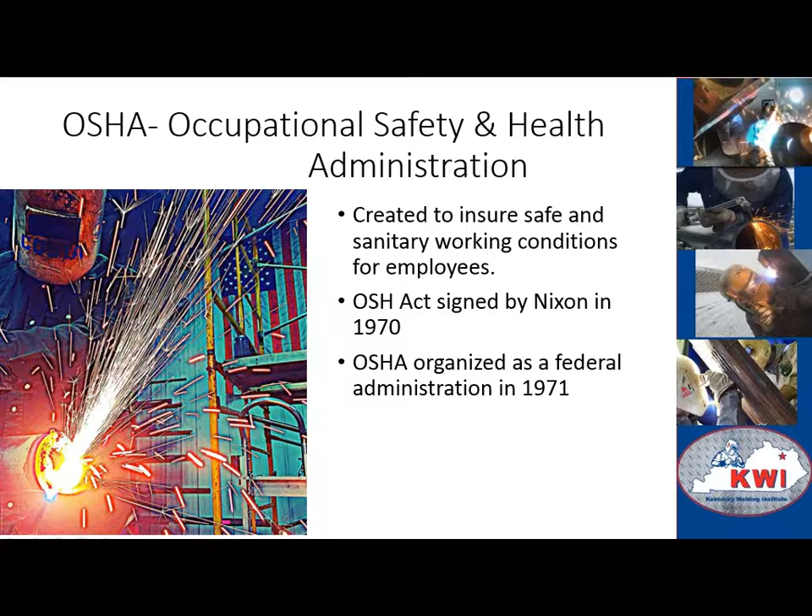Part of OSHA requires that you have the right to know the types of hazardous materials that you're working in or around. So SDS's, safety data sheets, are required by an employer in order to inform an employee what they can be exposed to.

Inside these, each product, for example AL8, has an SDS, and that is 16 sections of anything that would happen, or numbers you could call for who made AL8. Section 4 is first aid and CPR - if you eat it, swallow it, get it in your eye. Obviously with AL8 it's not a big deal, but a 7018 Lincoln Electric Excalibur rod, the SDS is 21 pages long.

Again, 16 sections. I think section 5 is in case it caught on fire - what would the fireman have to do? The 16 sections are nice because now you can roll in easy and find exactly the information you need. So firefighters know to go to section 5 when a product is on fire.

It used to be they weren't organized like that. Pepsi could have only 4 sections, Coke could have 26 sections, all in different order. Now SDSs are uniform - everything has 16 sections, and those 16 sections are all titled the same. Section 1 is product information, who made it, and how can I get a hold of the company. Again, that's all part of your right to know as an employee the types of materials that your company is exposing you to.

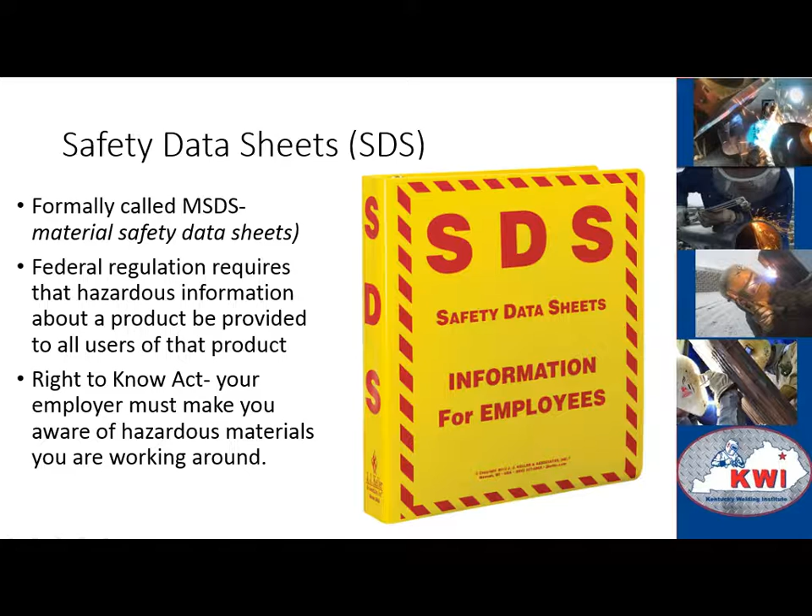PPE starts with eye protection. That is the number one piece. If you had nothing else on, you would need to protect your eyes. Always worn in the welding shop, never taken off under a face shield or welding hood. Those protect your face, they are not to protect your eyes - so again, two separate pieces of PPE. Putting a face shield on does not mean you can take your safety glasses off.

Clear safety glasses are great indoors. A lot of companies view shaded lenses as hazardous inside. Obviously it's already dark with shadows inside the building, and then you put sunglasses on - that's not really helping you out any.

Minimum oxy-fuel cutting and welding is a shade 4, and the glasses must be stamped with an ANSI code. We'll get into here - the next slide will teach you more about ANSI codes. But Z87.1 is the lowest level. Z87 Plus is actually a high velocity impact rating, and then you can have extra suffixes.

So this has an L8, a D3, and a D4. This is showing the D4 is dust protection, D3 is droplet and splash protection, and L8 is a visible light filter, glare reduction. So these L8 would be like a mirror finish on them.

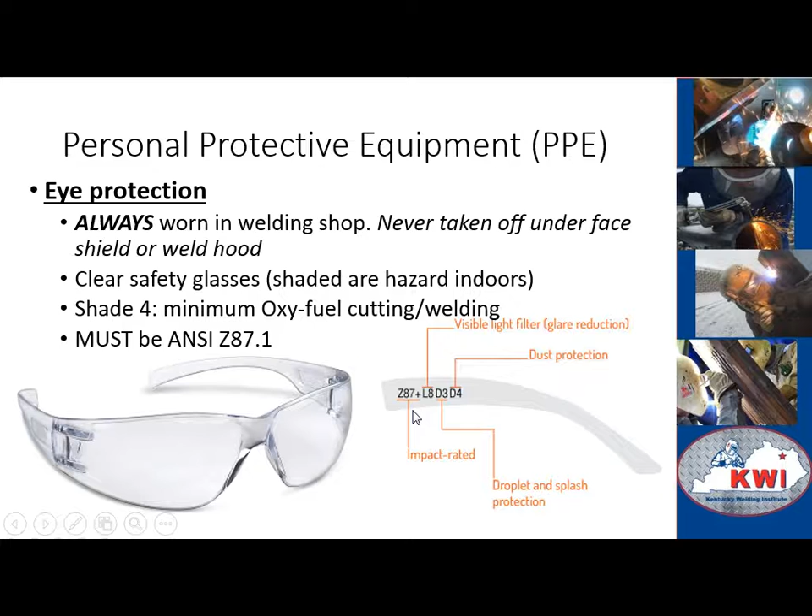So here's all the codes. Z87 plain is just regular basic impact. Z87 Plus indicates a high velocity impact, so it can take a little more brunt or blow. D3 is splash and droplet, D5 is fine dust.

If you had a W on your glasses, they would be shaded for welding. Hopefully that would say W10, and even then you'd probably get your face melted off or sunburnt. But you can have welding shaded glasses. UV protection, you'd have a U and then a number that would indicate the level of protection. Then you've got the R for infrared. Visible light filter, again that's the L - we saw the L8 last time. There you go, L8.

Prescription glasses, you can get your safety glasses done by an optometrist who gives a prescription and puts them right into your safety glasses. Those would have a -2 on the end of those. The head size, if you have an H, indicates they're small glasses made for kids, and a V for photochromic, or S for special lens tint. But if you ever wonder what all those suffixes mean, there you go. You can look them up if you need to.

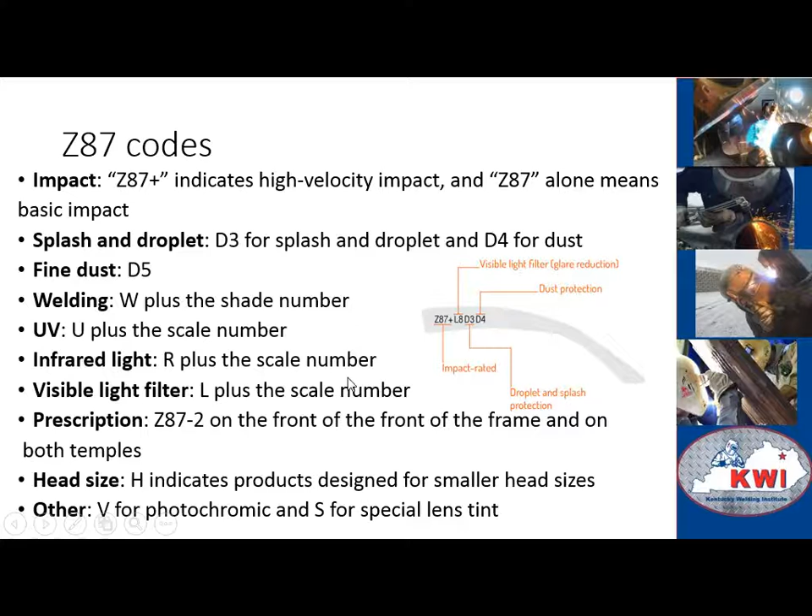Face shields, worn for grinding, cutting, or other operations that cause flying debris. Typically what you're seeing here, this is a shade 5 face shield because he's oxy-fuel cutting right there. He's got a hard hat on, and he's attached to a halo. Now you can get more Walmart style, but this is industry right here.

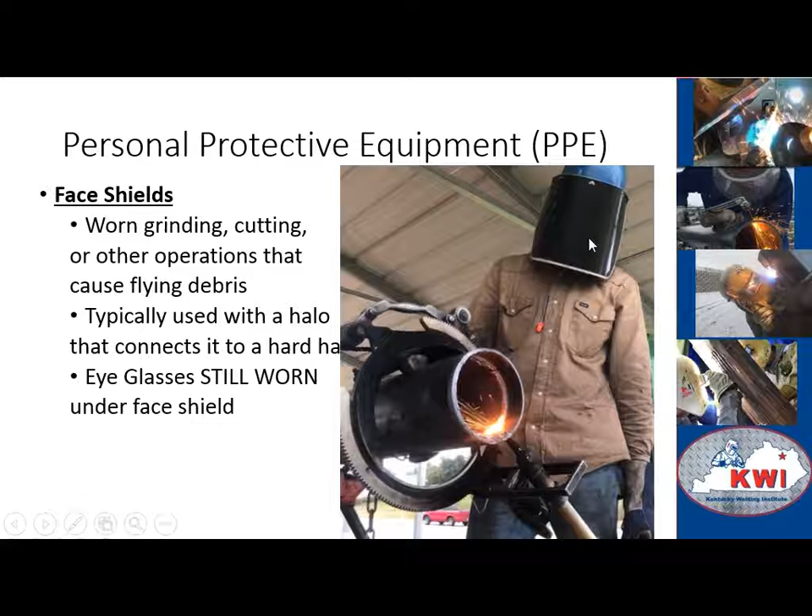So a hard hat with a halo, you can see maybe this guy right here too on the side. See that aluminum ring around his hard hat? He's got a clear face shield on maybe, and he's got evidently some shade 4 or shade 5 safety glasses on, to protect his eyes because he too is oxy-fuel cutting. So that halo connects to the hard hat, and then your face shield connects to that halo. But eyeglasses are still worn underneath of that. And of course, face shields can be clear for grinding, and then shade 4 at a minimum for oxy-fuel cutting and on up depending on the operation you are performing.

Welding hood, hopefully you're a shade 10 at least, and then that's going to go up as the amperage increases. So if I was arc gouging at 250 amps, then I might want to push to a shade 12. So that's determined by the amperage or the brightness of the arc, but typically that brightness happens because of the amperage, the current being flowed through.

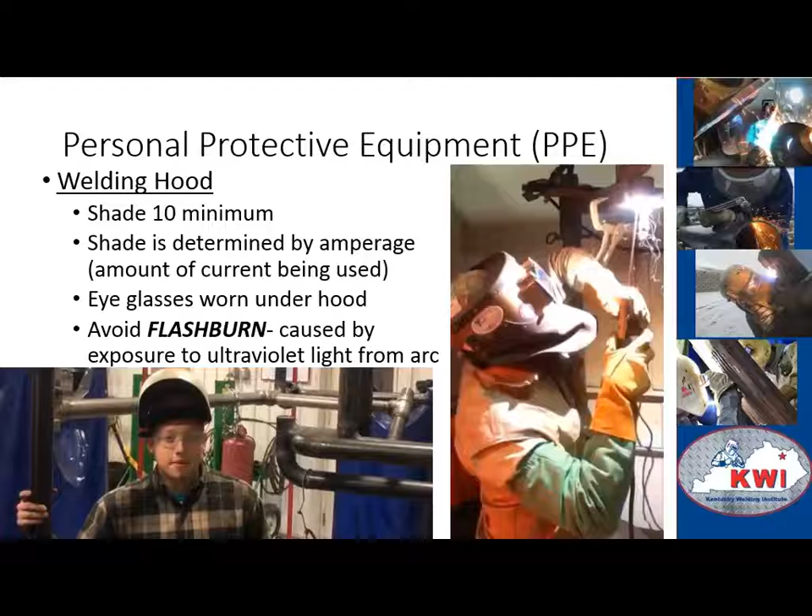Again, eyeglasses still worn underneath the hood. Look at Brandon here, he's got his hood just popped up. He's got his eyeglasses still on. That's exactly how it should be. You're going to avoid flash burn, not by closing your eyes when you tack something, but by using your safety glasses and your welding helmet to protect exposure from that ultraviolet light from the arc. So don't be that guy who just closes their eyes or turns their head slightly and makes a couple tacks. Get your hood on. Even safety glasses, clear glasses, as you're walking by somebody welding, it's going to reduce the glare coming off that arc, reduce the chance of flash burn.

What types of clothing can you wear while welding? Well, hopefully you're keeping all your skin covered, because again, it's going to give a sunburn. Even short circuit MIG welding for extended periods of time will give you a really good red tint to your skin. So cover all your skin up. Hopefully we're covered up with cotton or wool or leathers maybe. Synthetics are not good because they're going to melt to your skin. So where cotton might burn, catch on fire, of course you can skin that off. The synthetics are going to burn and then melt, so you can't get them off. They're going to peel or stick to your skin.

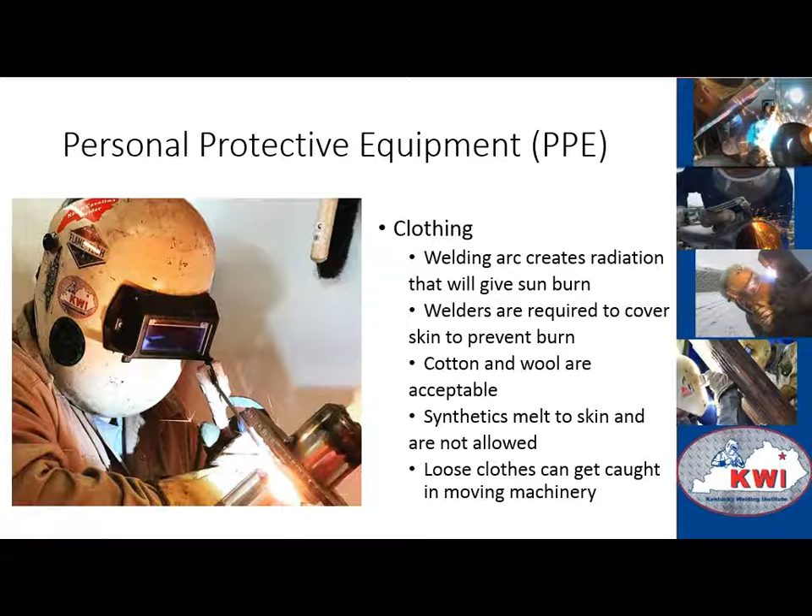And watch your loose clothing, it can get caught in some moving machinery. I've seen a guy get uppercutted by a grinder because the tails of his regular work shirt got caught in that, and that thing climbed his shirt quick and then popped him in the bottom of the chin. So watch your loose clothing. Jewelry can be pretty hazardous, pretty dangerous in the weld shop.

Gloves, leather gloves are typical. Thickness depends on the type of operation. So if I'm TIG welding, I need a feel, so I've got maybe some light duty gloves. If I'm arc welding, arc gouging, maybe oxy-fuel cutting, I might have some thicker leather gloves on. Those operations tend to be a little hotter, I guess, to my hands.

So what types of burns are common? Again, we go back to maybe your TIG welding in t-shirts, you can get that sunburn. You can get a first-degree burn from just the radiation coming off of those processes. Let's say you pick up a piece of hot metal and your skin blisters, you get that burn, that's a second-degree burn. And then third degree, you'd probably have to have a deep tissue burn. If you want to say maybe occasionally we get a third-degree burn, drop a piece, catch some slag down the shirt and just can't peel off fast enough, and that kind of sinks in there and gets one of those really whitish burns, and that slag really sinks in there.

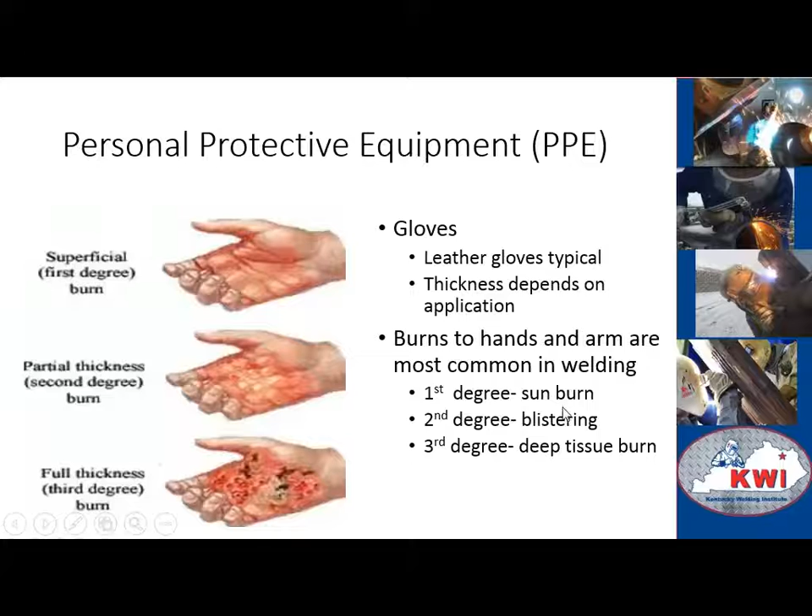That's a deep tissue burn. Typically third-degree burns can be upscaled depending on where they're at. Burns to the groin, neck, face, that kind of stuff tend to get upgraded to third degree just because of the sensitivity of the area. But there you go: first degree sun, second degree blistering, third degree deep tissue.

So wear those gloves, ear protection. At around 85 decibels, you're going to want to put earplugs in. Exposure to loud noises hurts your hearing, and your hearing never gets over that. It's not like getting a cut on your face that heals and goes away. As your ears take damage from excessive noise, they never quite recover, and that compounds.

That's why the older your grandfather wears a hearing aid. So use those earplugs. Here's this cat, see that blue cord going into his ear right there? That's to a set of earplugs. A lot of times, and of course he's grinding, so that's going to be 85 decibels. But even when we're just welding, welders like to wear earplugs to prevent sparks from going down their ear. I typically take that beanie and flip it over my left ear, since that's the closest ear I've got being right-handed. But try to keep those sparks out of your ears as well.

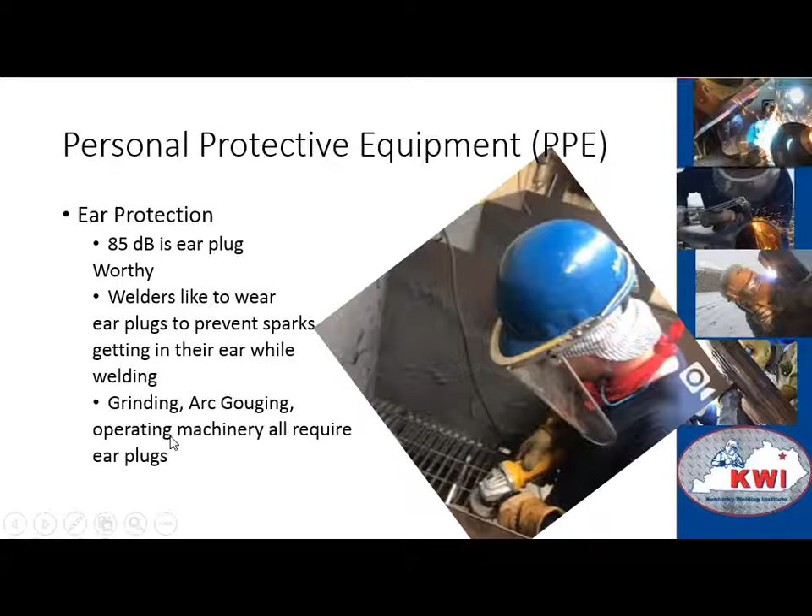So welding hazards, you're going to want to know this. The top three: radiation, fumes, toxic gases. Radiation, of course, coming from that arc—we talked about getting sunburn. Fumes, just from welding itself—you don't want to get your face over top of the plume, over top of the smoke coming off of your weld. Hopefully you can back up a little bit and get out of the way, let that smoke go up into your fume extractor, into the atmosphere, so you're not huffing and breathing that stuff in.

Toxic gases come from welding certain metals. So you've got a list here: zinc, cadmium, lead, chromium, beryllium, and stainless. Zinc is on galvanized, so that's going to give off a nasty fume, and then stainless gives off hexavalent chromium, which again is not a good thing to be breathing in.

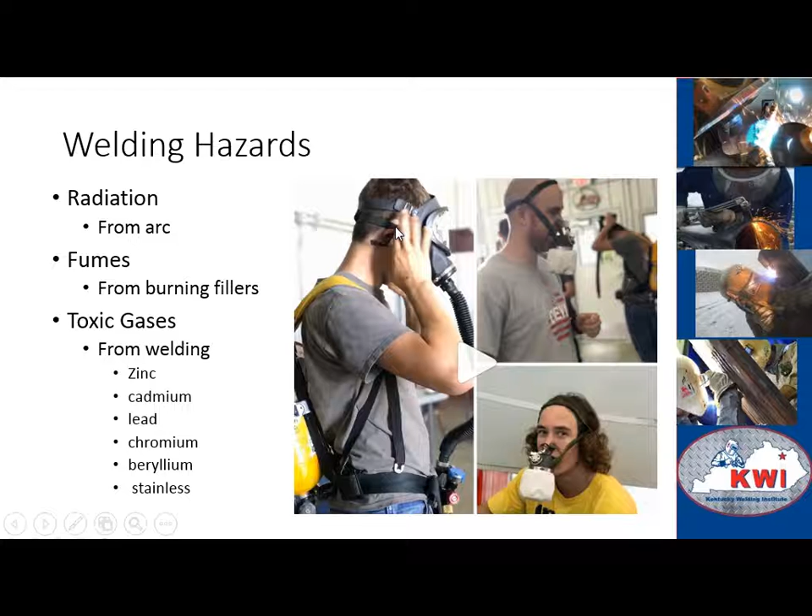So here we've got some guys. These two on the right are self-rescue units for MSHA training—that's actually what they just got done doing. That's if you were in a mine and there was no more oxygen left, and you had to pop one of these in to get to an exit. This is an SCBA, much like what firefighters use, but it can be used for welding applications as well if we're welding around some toxic gases.

And typically that happens in a confined space. A confined space is defined as a place large enough for a person to enter, but not intended for human occupancy. So your closet in your house technically is a confined space, right? I mean, when the carpenter built it, you can walk in it, but it wasn't designed for you to occupy, for you to hang out in.

Never take compressed gases in with you. Oxygen monitoring is required to make sure there's suitable air in there to breathe, but you don't want to ventilate with oxygen—that would enrich the environment with oxygen and make everything highly flammable. Areas of less than 10,000 cubic feet or ceilings less than 16 feet require forced ventilation. So most welding shops are going to have a fume extractor to pull those particulates and fumes out of your breathing area, and ventilation should be as close to the fume source as possible. Our hoods, we try to get you to weld directly underneath the hood opening so that stuff goes right up and out, and again, you're not breathing that in.

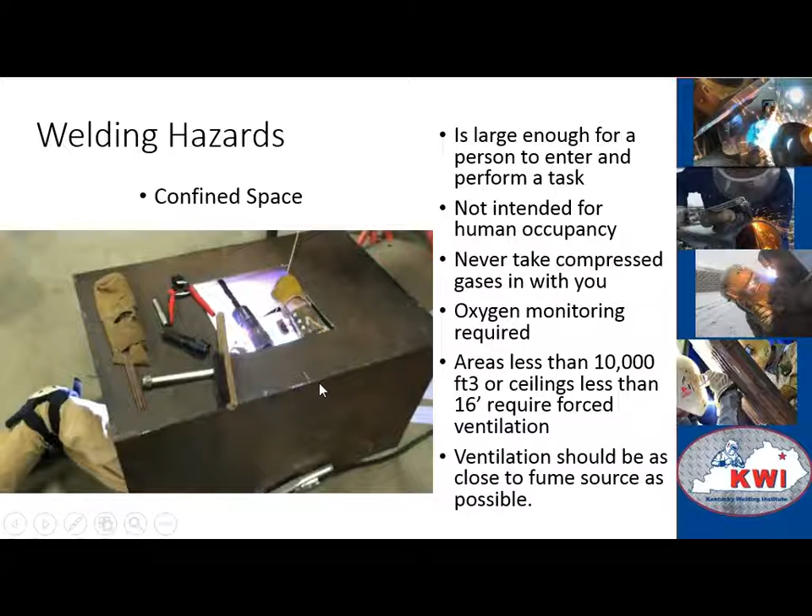I think that's Keegan Dale's inside the hot box there. So there you go, he's in a confined space, all bowed up, TIG welding. Looks like some 5G there on some 2-inch.

All right, hot work permits. A hot work permit is basically you asking permission to perform hot work on a company's job site or on a host company's property. It allows the performance of work potentially posing a fire hazard. So anytime you're throwing sparks, it could be grinding, depending on your company and how far they want to push it. But welding, cutting, all this stuff, we're throwing sparks, we could cause a fire.

So you're going to have some basic information here: name of the company, date, who you are, location of what's going on. And then over here's a checklist to keep you honest. Essentially, it's asking you questions like, have you prepared the area? Are there any combustibles within 35 feet? So you're checking yes or no for how you prepared the area. And then you're going to turn that into your boss, and he's going to look it over and sign off and say, yes, you can go throw sparks.

You can see the perforation here. This is going to be a carbon, so you've got a yellow on top. It's got a white and a pink behind it. You keep maybe the yellow copy with you, tied off to your oxy-fuel cart, and then that white copy goes to your company and the pink copy goes to the host company. But everybody has a record of your hot work permit that you've signed off on.

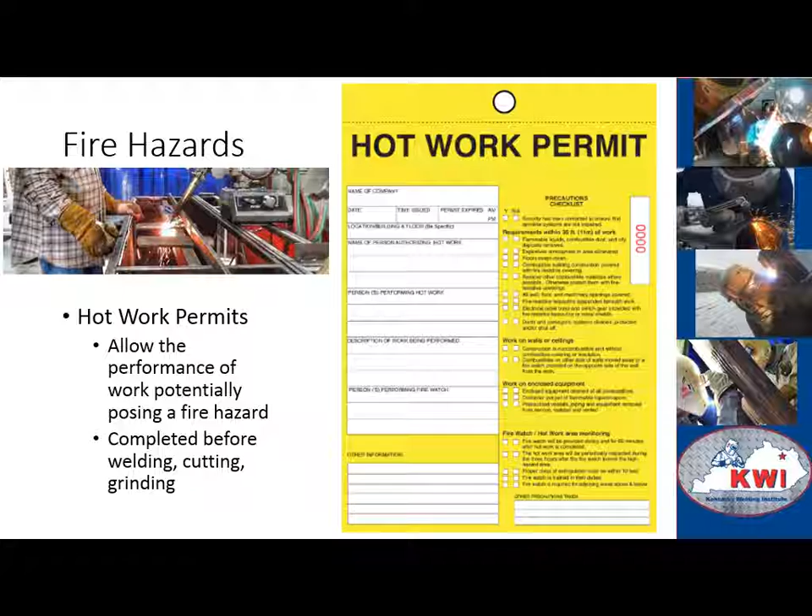Fire hazards, speaking of fire hazards, typically you're going to have a fire watch. So if you're somewhere, there's going to be someone paid to watch you weld in case a fire was to break out. So they'll have that hot work permit close, they'll have a fire extinguisher close, and hopefully they know how to use it.

Your extinguisher types are: A, ordinary, which is paper, cardboard, wood, ordinary combustibles. B, flammable liquids, so diesel and gas. C, electrical. D, soft metals, examples are aluminum and magnesium. K is a kitchen fire.

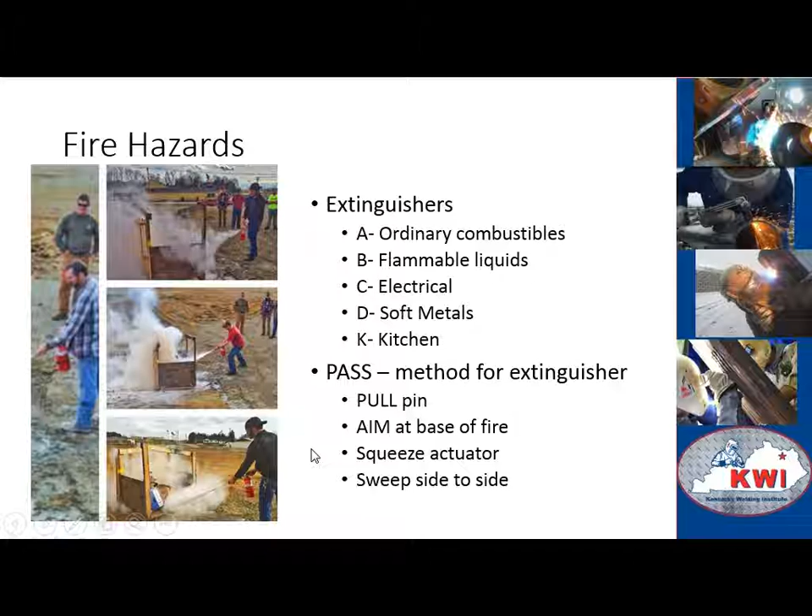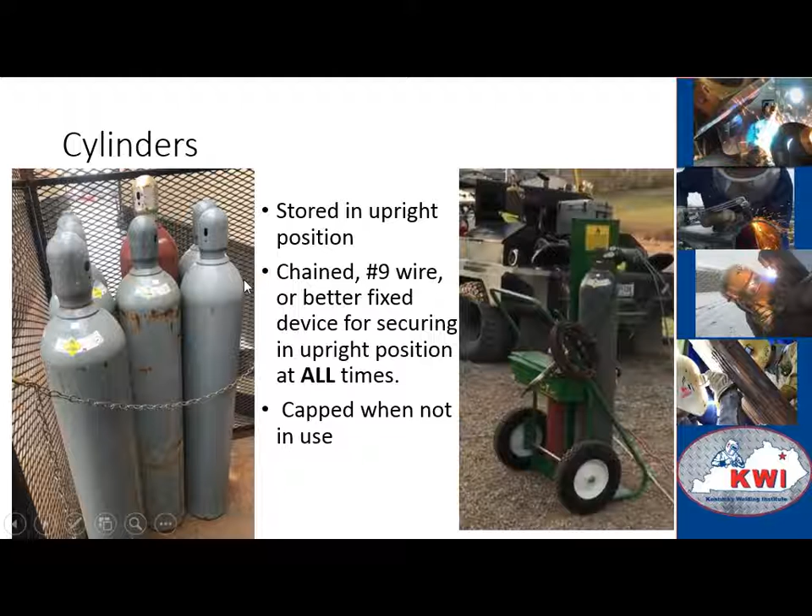They're always capped when not in use, all right? So we never roll them around or move them uncapped. Of course, this is on a cart secured in the upright position. You might move this a little bit, but what I'm saying is you wouldn't take this bottle with the cap off and take it to the Scott Gross truck. You'd always want to cap on when you're moving them from point A to point B. There's that big metal strap that I was telling you about earlier, securing those in the upright position.

Let's talk about the oxygen for a minute. Liquid O2 can cause frostbite, just like liquid anything really. Think about the LP gas that maybe you use to cook with your grill. You go get propane at your local gas station or whatnot, and that comes out pretty cold. Those guys wear gloves when they're filling up your cylinders. A fully charged cylinder contains 225 at 90 degrees Fahrenheit.

Pure oxygen cannot be used as a ventilation source. You would not want to ventilate with pure oxygen, as that's going to cause a very flammable work environment. Oxygen-rich environments are extremely flammable and essentially cause the flash point of everything to go way down, so things can catch fire much easier in an oxygen-enriched environment.

Acetylene not stored with oxygen must be 20 feet apart from oxygen, or separated by a 5 foot tall, 30-minute burn rated wall. Notice these are capped off, so technically they're in storage. They would either have to be separated by 20 feet or, on these OSHA carts, separated by a 5 foot tall wall made of two pieces of sheet metal, 30-minute burn rated. So these are technically by the book stored appropriately.

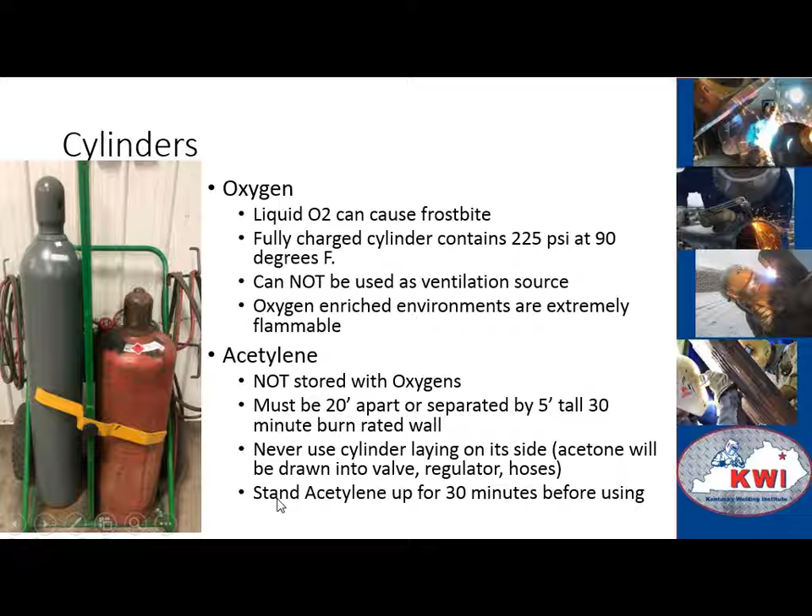Never use a cylinder laying on its side. The acetylene bottles inside are honeycombed and have some acetone inside, which is a gummy liquid. If you lay them down, it can draw that acetone up and gum up your valve, regulator, and hoses, which will prevent you from being able to turn it off once you turn your valve on. So stand acetylene up for 30 minutes before using it.

For oxy-fuel cutting, your oxygen hoses are going to be green, with right-handed threads, typically set to about 20 psi, maybe 20 to 30. Fuel hoses are red - acetylene, propane, or MAPP gases go through red hoses with left-handed threads, so you can't mix and match them. Those are typically set to 5, maybe 7 psi, but acetylene especially, you never go past 15 psi.

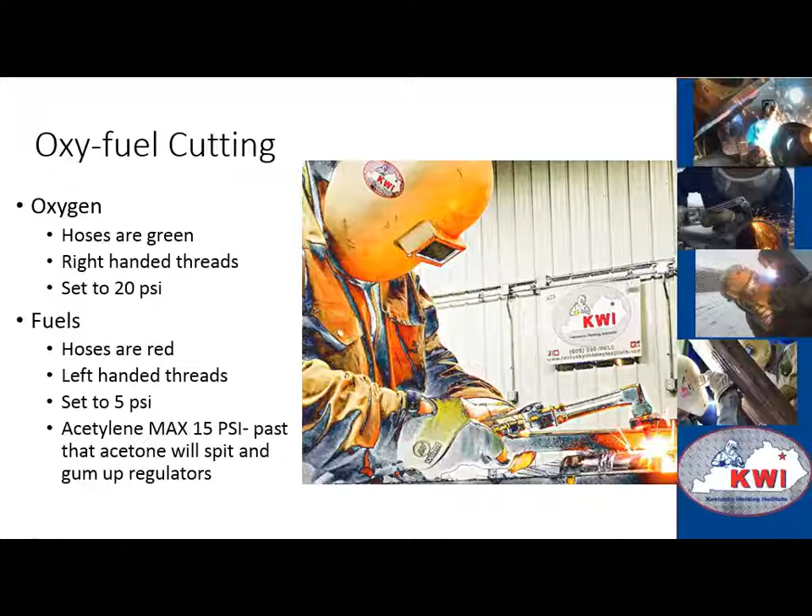15 psi is the red line. That acetone is going to come back up again, spit out, and gum up our regulators, preventing us from being able to turn that flame off.

Never get oil on cylinders, regulators, connections, or hoses. Obviously, oil is flammable, and we don't want that around our oxy-fuel setup.

Only light with a striker - you don't want to use cigarettes, cigarette lighters, cigars, or goofy stuff like that. Always use a striker, an appropriate OSHA-approved means for lighting your torch. Butane lighters for smokers that carry plastic butane lighters in their pockets are pretty dangerous, because any little spark that hits your jeans pocket can be enough to cause that plastic to melt and cause the butane lighter to explode in your pocket. So a butane lighter is not cool to hang on to when you're in and around hot work.

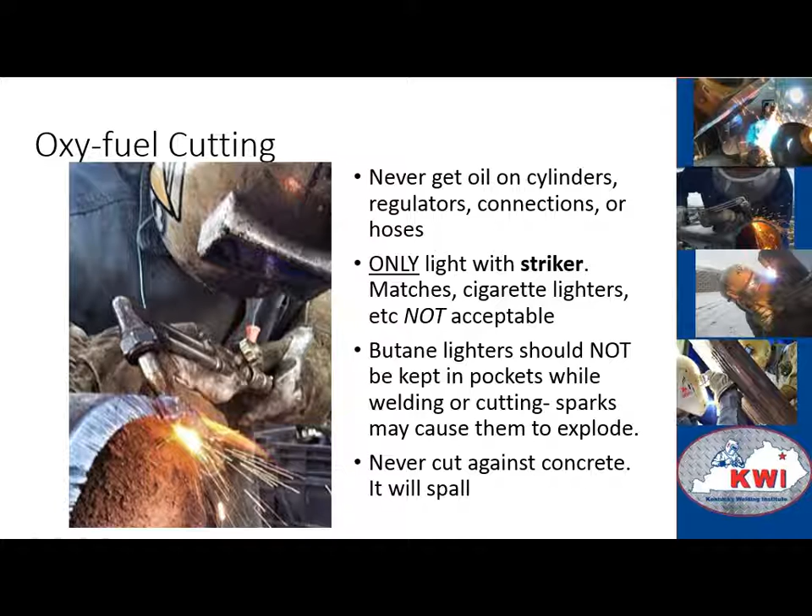Never cut against concrete. You wouldn't want to lay a piece down and cut directly against concrete. Concrete has a high moisture content as it's still curing out or whatnot, and it'll spall - essentially it'll explode, erupt, pop loose, and again cause flying debris. So not cool. A couple more welding safety tips here.

Never use welding equipment beyond its rated capacity. Don't operate welding machines standing on wet or damp floors. You should always take electrodes out of their holders when not in use, otherwise they could arc out on grounded metal surfaces.

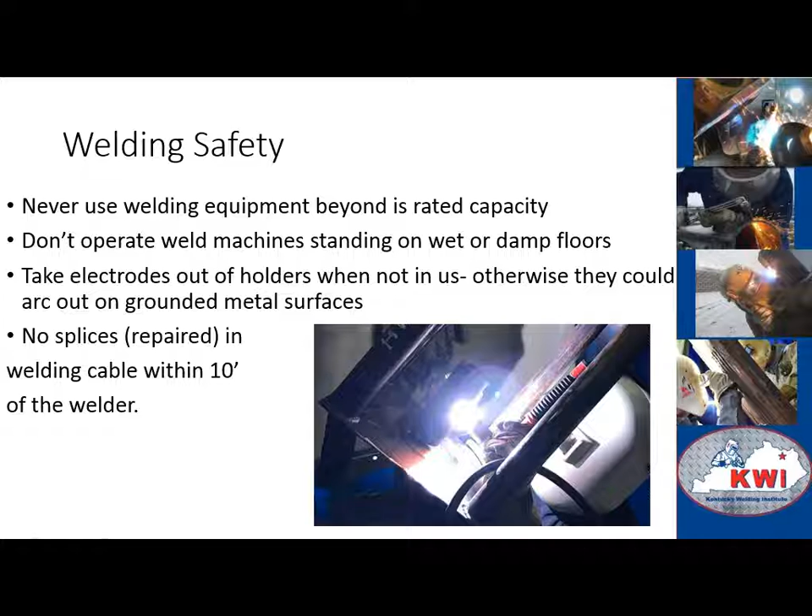If you have to splice your welding cable, make sure you can't have any splices within the first 10 feet of your lead. They want that first splice away from the welder - so no splices within 10 foot of the actual welder, and that's you, not the machine.

Here's some review, true or false. Radiation, fumes, and toxic gases are all potential hazards related to welding - that is true. Fully charged oxygen cylinders contain 225 at 70 degrees - that is false, it was 225 at 90 degrees.

Number 3: in a confined space, using 100% oxygen is an acceptable ventilation source. Can we use 100% oxygen to ventilate somebody inside a confined space? False - that would create an oxygen-rich environment, which would be a bad deal.

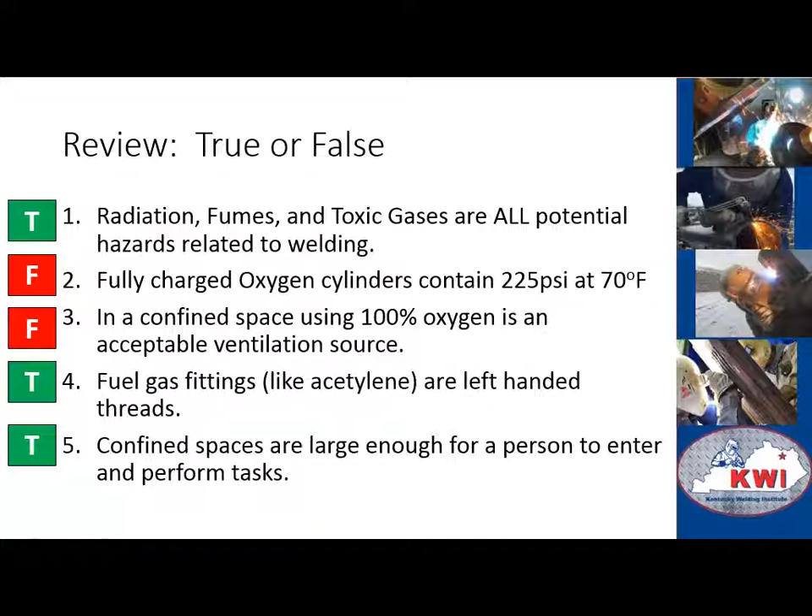Number 4: fuel gas fittings, like acetylene, are left-handed threads - that is true. Number 5: confined spaces are large enough for a person to enter and perform tasks - that also is true. All right, that wraps this up. Appreciate your time, good luck on your test.